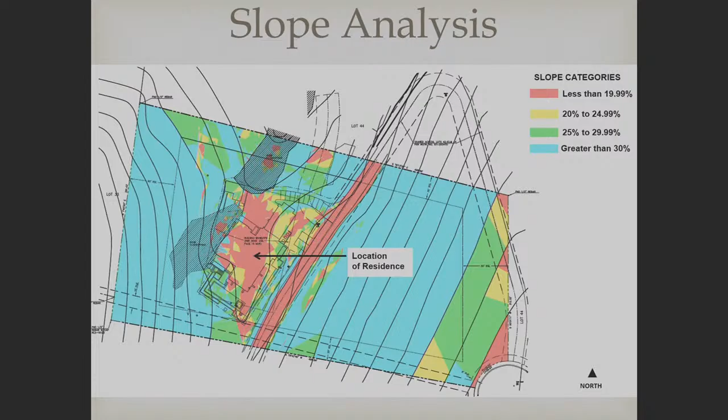So we look at mountainside cases from 2 perspectives. One is specifically related to zoning and the development standards. Actually, they're both zoning standards, but these are the ones that are sort of the development standards that talk about how large the project can be, where it sits on the property.

So, for example, the first thing is we look at lot coverage, and lot coverage is anything under a solid roof, whether it's habitable or non-habitable space. So it could be a patio cover, it could be a garage, the house itself. Anything under a solid roof is considered lot coverage. In this regard, the lot coverage is 4.39%, so it complies with the allowed 13% for the zoning district.

Then we look at disturbance area, and disturbance is anything that's been proposed on the lot, and it also includes, as I'll note in this case, if they were proposing any kind of septic system. It's any kind of disturbance - front and backyards, driveways, walkways, and of course the structures themselves. In this case, 14.3% complies with the 39% allowed.

Setbacks, again, these are basically zones where buildings cannot sit, and so it's 60 feet for the front and the rear of the property and 30 feet on the sides, so that's perpendicular to each of those property boundaries. And once again, the house and the casita are located within the town's buildable area.

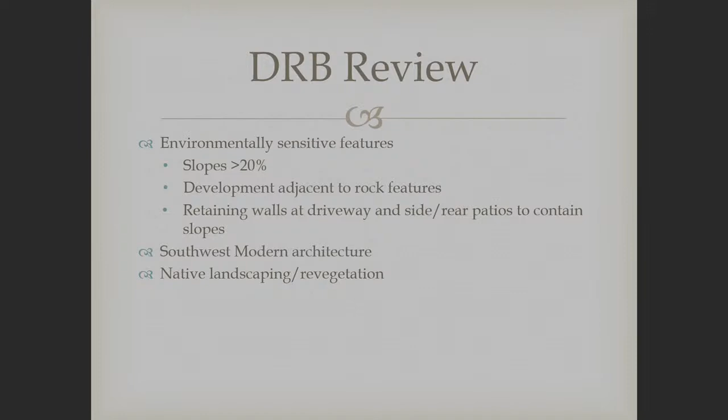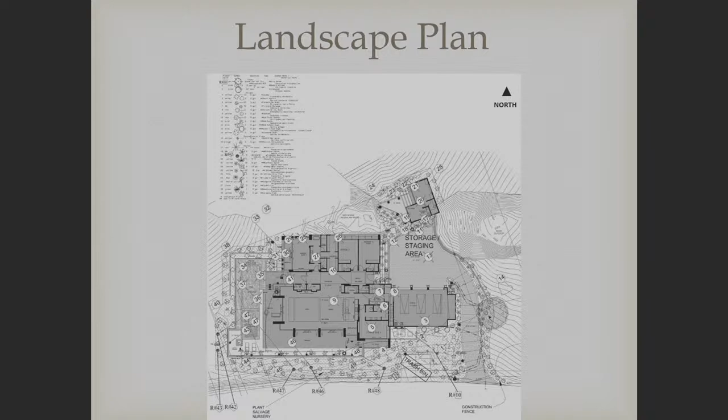As you could see, they will be utilizing native landscaping for revegetation. Here quickly is the landscape plan, just to get the idea. What's really important about it at this point is not only the list of plants proposed, but you can see how tight the building envelope is, and anything disturbed that's not hardscape or building structure is landscaping.

So again, is that door locked? Okay, we've got to figure that out.

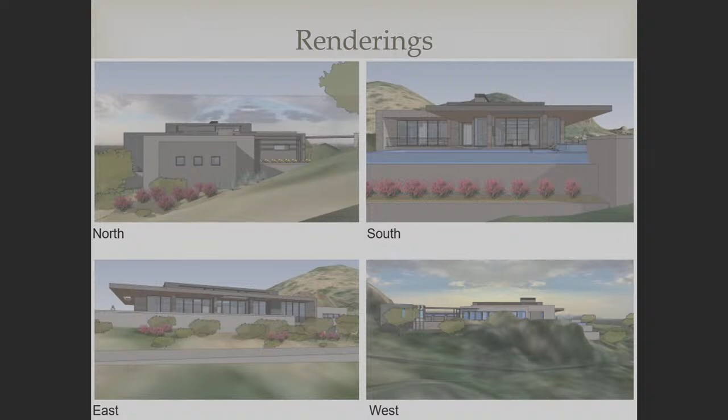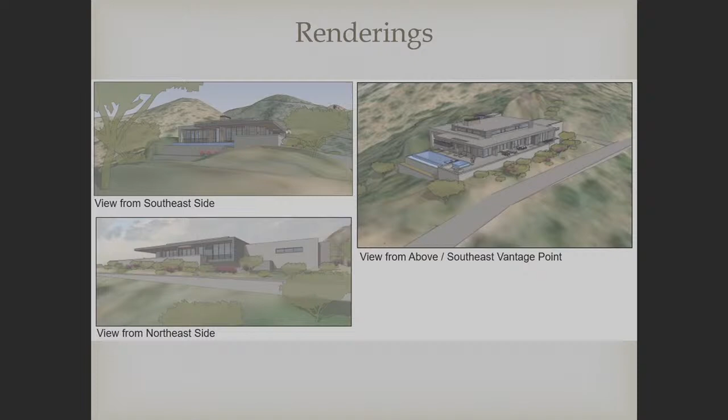Here are some renderings showing each side of the home, the architecture itself. You can see from the west, which I'd say is the Cave Creek Road view, it's shielded or buffered by the rock features themselves. The other elevations have a very clean, low-profile look. Here are a couple more renderings so you can see different aspects, in particular the bird's eye view and how it sits in the landscape.

Related to this, it is a public process. You saw there was a citizen participation report included in your packets. One person did contact the applicant—it wasn't a resident or property owner, but somebody building a home for the adjacent property owner. I think they had a positive review, as well as the HOA, which has reviewed and approved the project.

As you see in your report, there are conditions for approval. So when you're ready to make a motion or approve, those are the things staff will be looking at once they submit for the building permit. With that said, a little more long-winded than usual, I'm happy to answer any questions. Also, the architect, Victor City, is here if you'd like to ask him specific questions about the project.

I had one silly question on the L2 landscape plan sheet. Even using a magnifying glass so I could read everything, and looking down a list of 49 different plants, and how quite well done they were, numbered and whatnot, what was getting moved and what was staying. What I couldn't find was 15 and 16. Nowhere.

Was that a salvage plant number you're talking about? Yeah, it was a plant that was gonna remain in place. Well, 13, 14, 17, yeah, I couldn't find 15 and 16. Maybe I'm just blind.

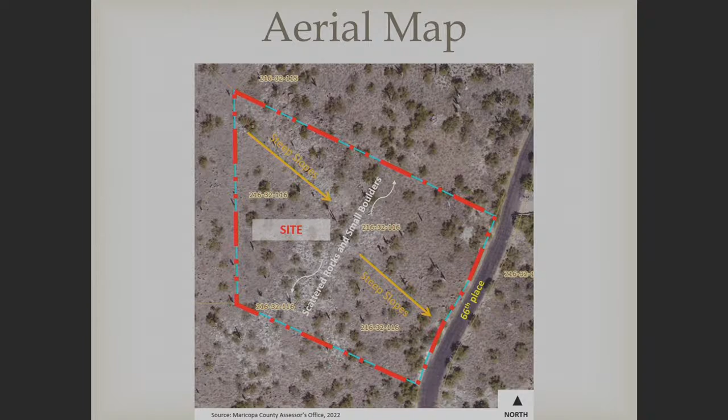Looking at a map, really the significance of this lot is the steep slopes, and they definitely presented a challenge to design a home on this property. There are some scattered smaller boulders and protected plants, but really, as we'll look at, the majority of the slopes were quite steep.

Here is a slope analysis, and in essence the whole lot slopes more than 30%, except a small portion where, as you can see, the driveway is being proposed. This, similar to the last project we looked at, has a defined building envelope, so the applicants are somewhat constrained to where the home can sit on the property.

Can you back up? What is the black dashed line on that image? Is your civil engineer here? I think it's the drainage area, if I'm not mistaken. A lot of times the slope analysis is created by the civil engineer, and I think this was just a graphic left on the slope analysis as part of the plan. The white dashed lines, or do they have nothing to do with it? The little white squares are the actual contour elevations, it's just small based on what you're looking at. No, but good questions. I don't want to have to give you all full-size plans, but that's fine, happy to clarify.

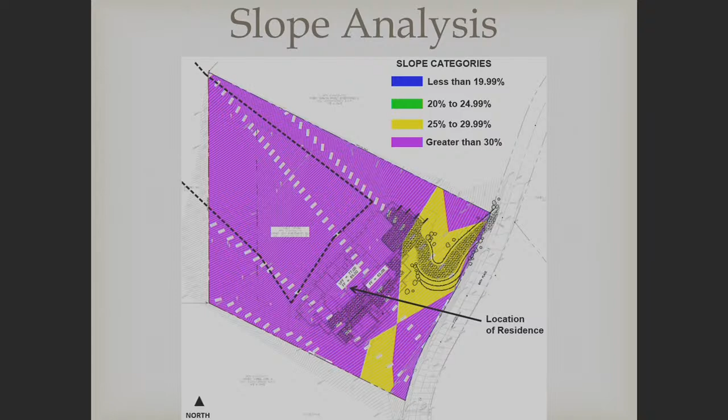Going through our development standards, this is also a Rural-70 single-family residential zoning district where lot coverage is 13% maximum, and this development is 9.65%. Disturbance area, anything proposed on the property that disturbs the lot, the maximum is 39%. This development proposes 23.26%, probably a little more challenging because of the steepness and the need for walls and terrace walls, so you see a little bit more disturbance on this property. The setbacks similarly do comply, including the retaining walls.

Including retaining walls, although I would say closer to the home, not necessarily the ones related to the driveway. 60 feet front and rear, 30 feet on the sides again. And once again, this home was constricted, or held to a defined building envelope.

The cumulative height is 39 feet 6 inches. It was incorrect in your reports, I apologize for that. With a 40-foot maximum allowed, I think the steepness is what necessitated having this tight, close to the maximum of 40 feet. The main structure, there is only a home, no casita, similar to the last project. It's 24 feet measured above finished grade and 24 feet above natural grade.

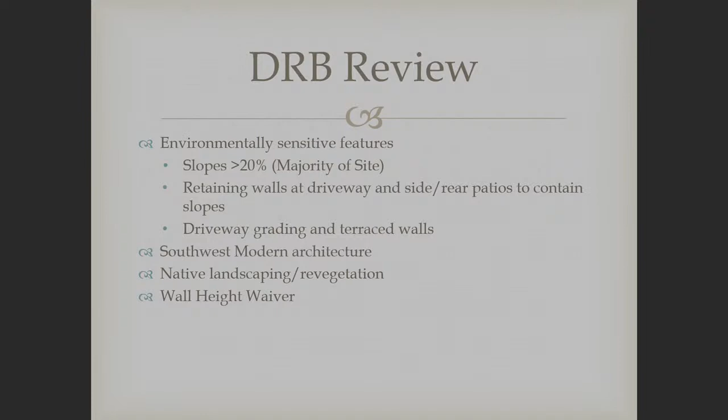Similarly, with the terracing, particularly at the driveway, you can see there's a bit more extensive proposed landscape, but it's still native plants. They'll be looking at salvaging protected plants on the property as well, and you can see once again it's tight to the development envelope, with disturbed areas becoming either hardscape or landscaping.

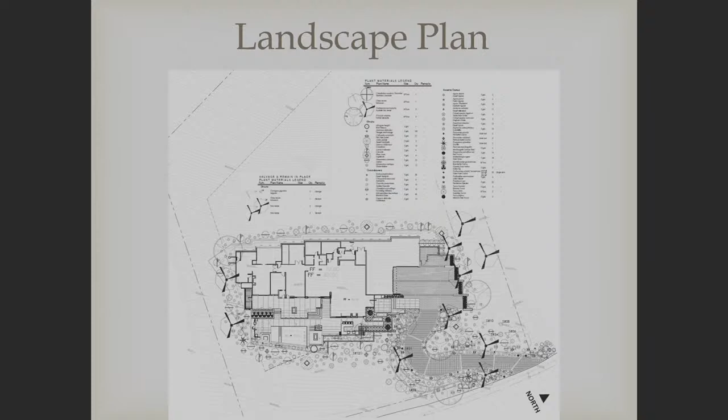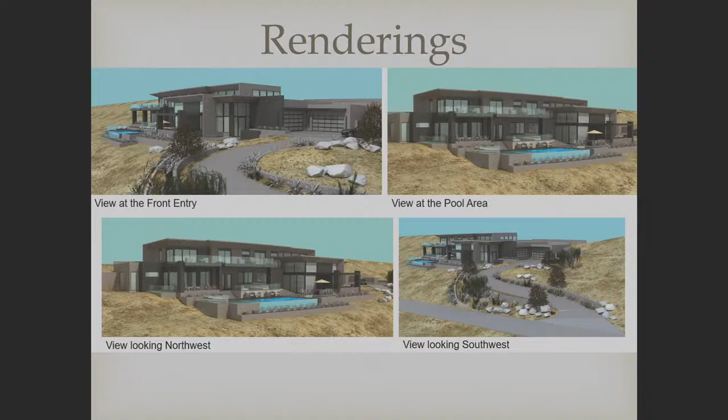Again, a couple of vantage points. I think what's important about these is to get a feel for the driveway, the walls, and the landscaping associated with them. Once again, hopefully we're getting closer to the requirements in the zoning ordinance if we can minimize the amount of walls adjacent to the driveway.

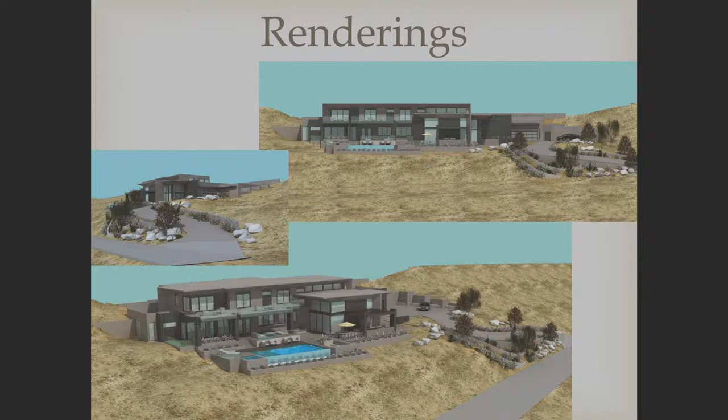Again, this is a public meeting and public process. One person was contacted by the applicant. As you noticed, it was a very minor comment. We did try to reach out to a new owner, but they don't have the proper address in Maricopa County's information, so we just can't reach out to them.

As I mentioned, the HOA has reviewed and approved the project, and in fact they've also looked at the wall materials that could be used adjacent to the driveway, and they've approved a stucco finish. The conditions are attached if you choose to approve this project. I'm happy to answer any questions, and the applicant and his design team are here as well, who would be happy to answer questions too.

So I have a question. Did you say that the HOA approved of the taller walls, all of them? Chairman, Mayor, Commissioner Dahlman, thank you. Yes, they did.

So they approved of the project. When they went back and talked a bit more about the walls of the driveway, initially there was a thought to utilize stone veneer at those driveway walls, but the applicant decided to go forward with stucco instead, so staff asked that they be sure the HOA was on board with that material.

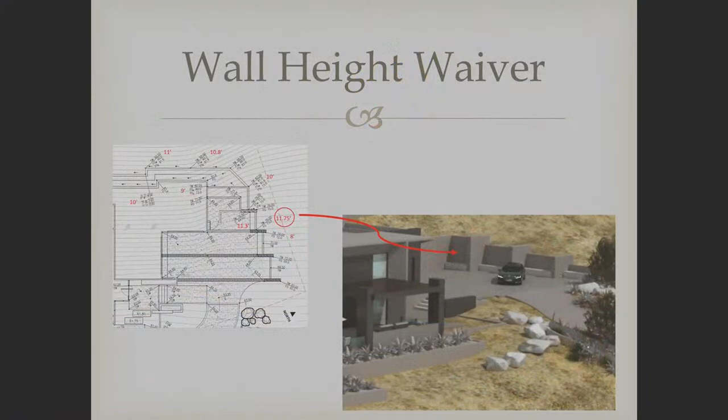Yeah, thanks, thank you. My name's Ken Zell, I'm the civil engineer for the project. The height of the wall is actually about 2 feet higher than the backside grade, and that's strictly a function of the drainage, trying to route all of that water coming from back around the house. So there is a little bit of exposure on the backside, just for drainage purposes. Thank you, my mistake.

And can you talk about the cut and fill ratio on the driveway as well? I can- we're in discussion in the sense that I believe, Ken, you might be able to answer this a little bit better than me, is that typically we like to see some profiles cut down the driveway, and it seems to appear that most of the driveway is on fill. Is that fair? As we get somewhat past the beginning of the driveway, and maybe if you need a different angle, I can.

Yeah, if you can bring up the grading and drainage plan. I think it's the... don't think I have that, I have the landscape plan, or... It was part of the packet? Oh it's in the packet, yes. Yep, I just don't have it up. Which sheet is it? It was near the back. Is that the number near the... one of two, it was the conceptual grading and drainage plan.

Slope analysis? Oh I see it. Yeah, it was the one before it. Which one? It's right before the last, very last page.